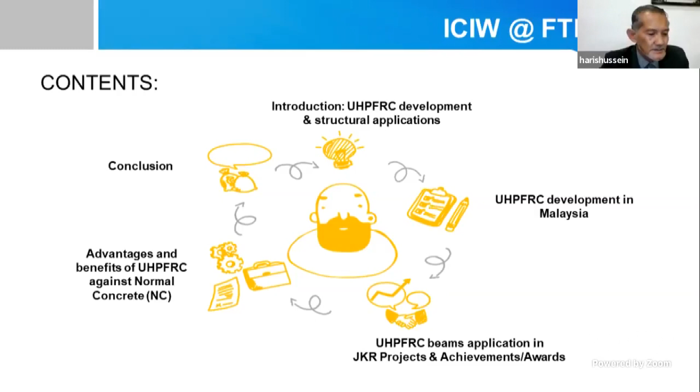Okay, let's go on to item 1, introduction. Ultra high performance fiber reinforced concrete was one breakthrough in concrete technology in the 20th century. Its dense homogeneous structure provides excellent durability properties, as shown in figure 1. Its compressive strength is more than 150 MPa, and tensile strength more than or equal to 8 MPa. And it was recorded as well that the ultimate flexural strength of the product is 30 MPa. In terms of structural application, details are shown in table 1. Okay, let's go to table 1.

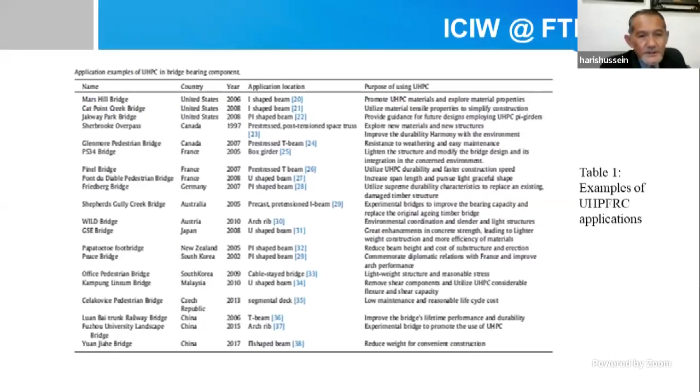As you can see, many applications have been done by many countries, like US, Canada, France, Germany, Australia, Japan, New Zealand, South Korea, Malaysia, of course Czech Republic, as well as China. In terms of application, mostly for superstructure, for road bridges, as well as pedestrian bridges, but a few for rail bridges, which is being done by China as well as Germany.

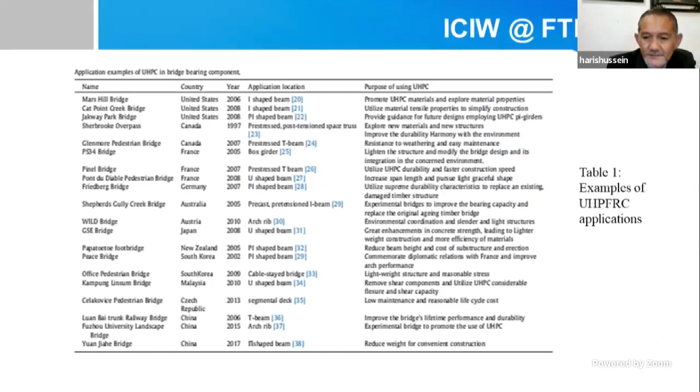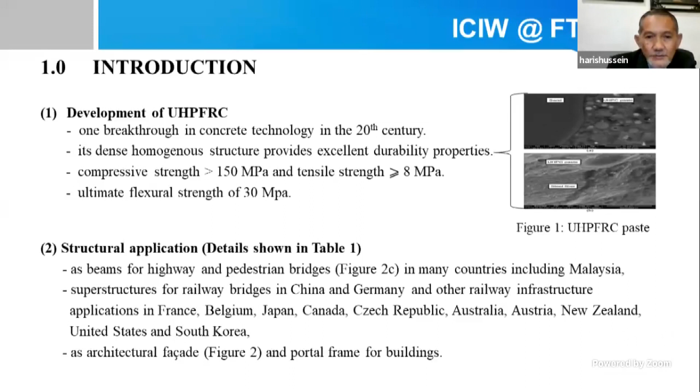Apart from beam superstructure, ultra high performance fiber reinforced concrete is being used as well for architectural facade and portal frame for buildings. Figure 2 shows some examples of being used for facade, like at Museum of European and Mediterranean Civilization in Marseille, France, and for footbridge of Peace in Seoul, South Korea.

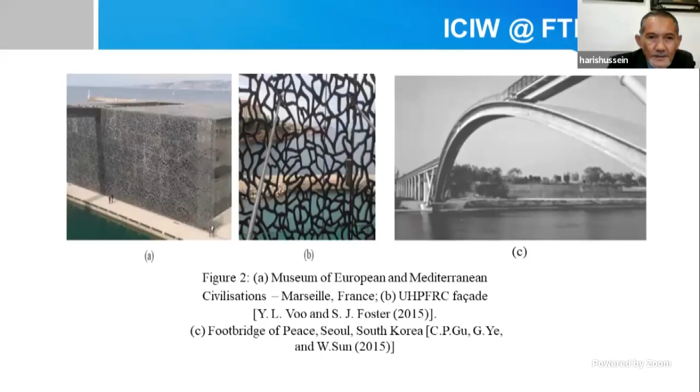Let's go on to the establishment of the company. It started when a company by the name of Dura Technology Sendirian Berhad was established in 2006, where a factory was built nearby Chemor town, about 17 kilometers away from Ipoh City.

The name Dura is synonymous with durability, specializing in ultra high performance concrete. The company believes with the advancement of technology in the field of building material, concrete can be innovated further, maximizing its potential and capability. DTSB, in short, aims to bring building material and building system into greener construction, the best solution to achieve sustainable development goals at minimal cost through continuous research and development for better product application.

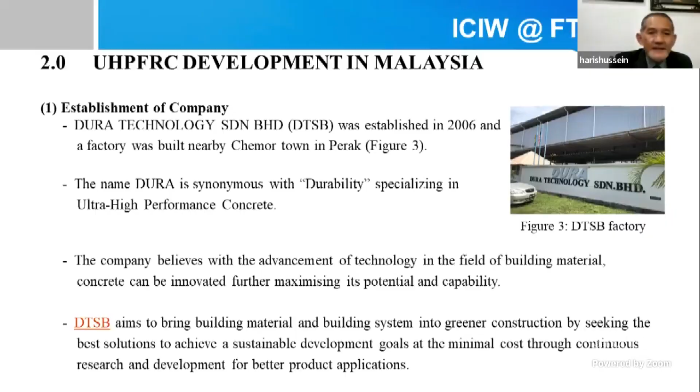Now let's go on. When did JKR first embark into this new concrete technology? It was in 2008 when JKR organized its Senior Officers Conference, or SOC, in Ipoh, Perak. I'm born in Ipoh, so I can just tell a bit about Ipoh. An exhibition booth was set up and local companies were invited to participate and share knowledge of their products.

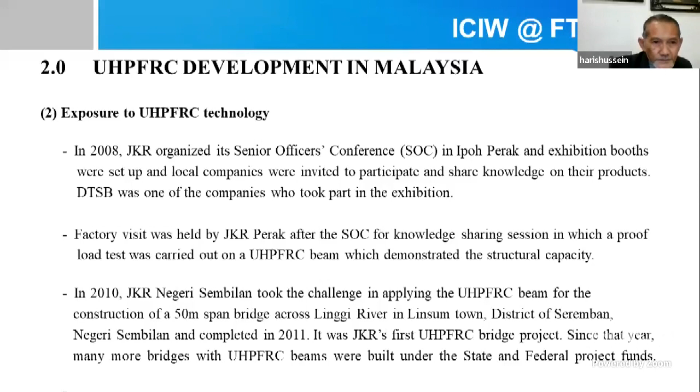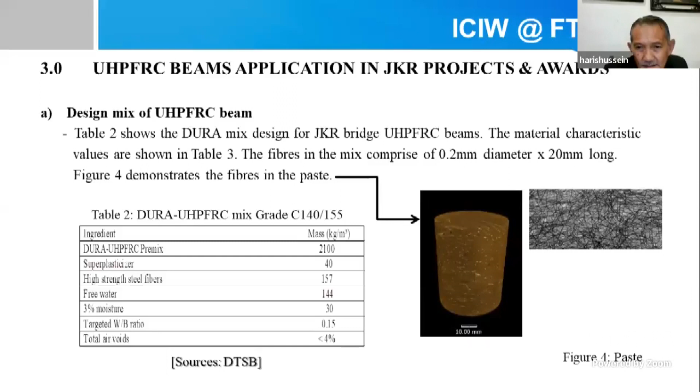Let's show the video, which shows how the mix is being done actually in the ultra-high performance concrete paste, whereby you can see the fibers are being mixed thoroughly.

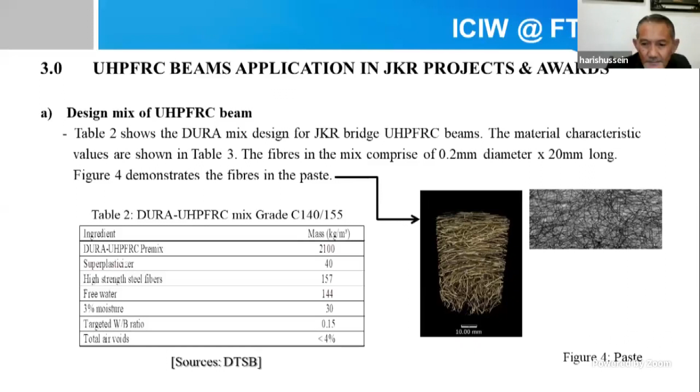Table 3 shows the material characteristic values for ultra high performance fiber reinforced concrete for grade C140, 155. In every design of beams for JKR bridge projects, the material characteristics are as shown in table 3. These values are verified by laboratory tests, with results shown in tables 4, 5, and 6.

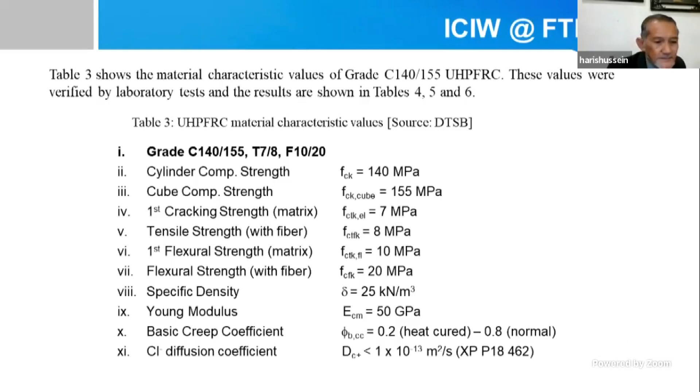Table 4 shows the characteristic compressive strength carried out on several cube samples, achieving 155.24 against the required 155. For characteristic compressive strength on cylinder samples, the value is 151 against 140, exceeding the limit required for the concrete grade.

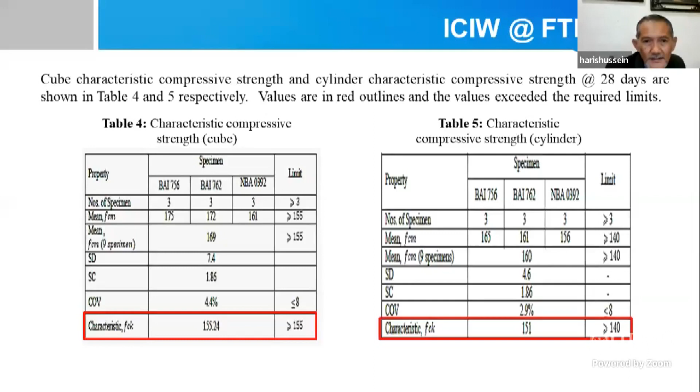Table 6 shows the results of the 4-point and 3-point bending tests for flexural and tensile strength for grade C140, 155. Values shown in red outline all exceed the limits and comply with the required standard. Figure 5 shows the layout of the bending test carried out to verify grade C140, 155.

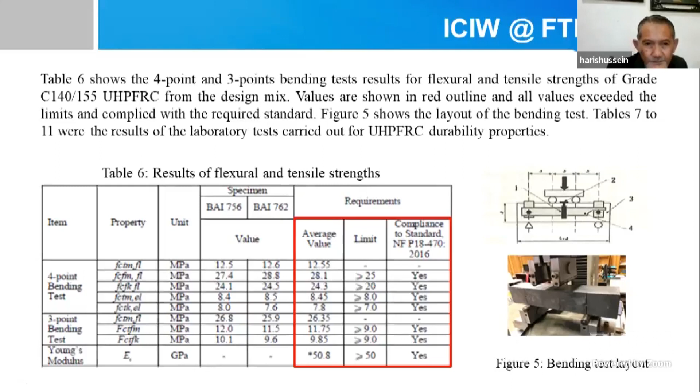Durability tests were also carried out, one of which is the chloride diffusion coefficient. The result for ultra high performance fiber reinforced concrete is much better compared to normal concrete used for structural components.

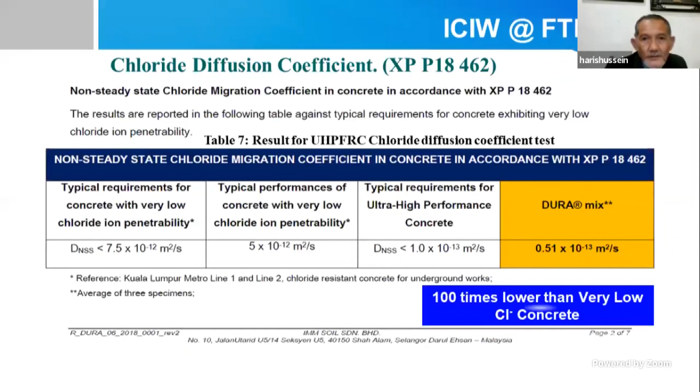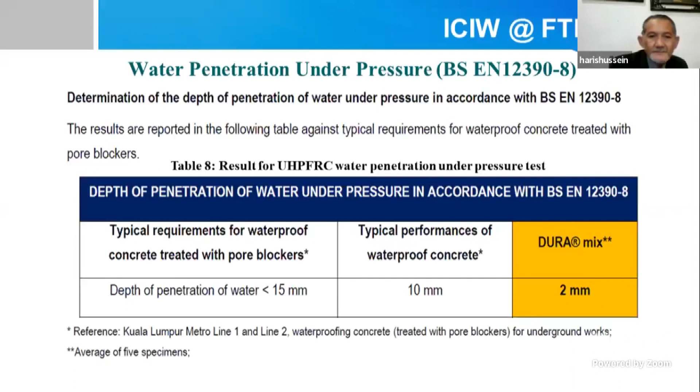Similarly, for water penetration under pressure, it is only 2 mm compared to 10 mm for normal concrete. The rapid chloride penetration test for ultra high performance fiber reinforced concrete is 35 coulombs, compared to 100 to 500 coulombs for normal concrete.

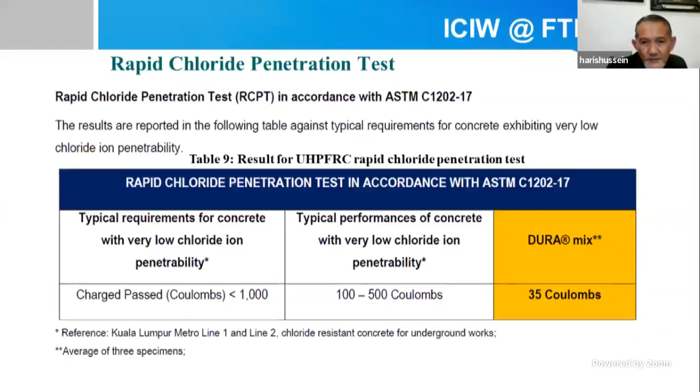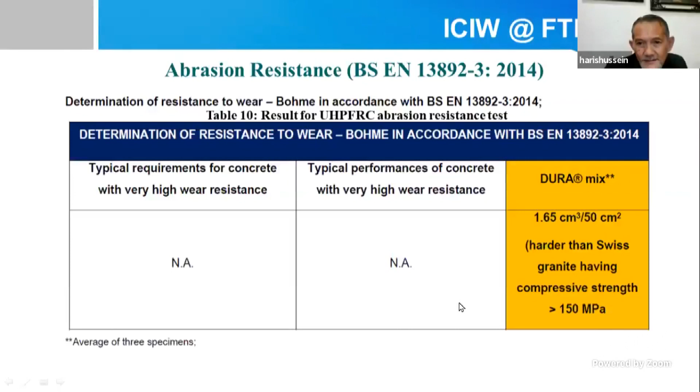For the abrasion test, resistance complied with the standard, and carbonation depth is 0 mm, meaning no penetration for carbonation.

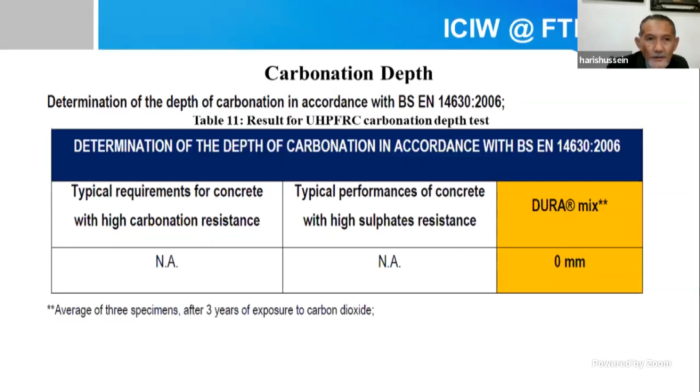In terms of standards for material design as well as construction, the French standards NFP 18-470, NFP 18-710, as well as the execution standard apply. P18-470 is for material compliance for the mix, and P18-710 is the design standard which needs to be complied with specifically for ultra high performance fiber reinforced concrete. The execution standard is to be followed during construction.

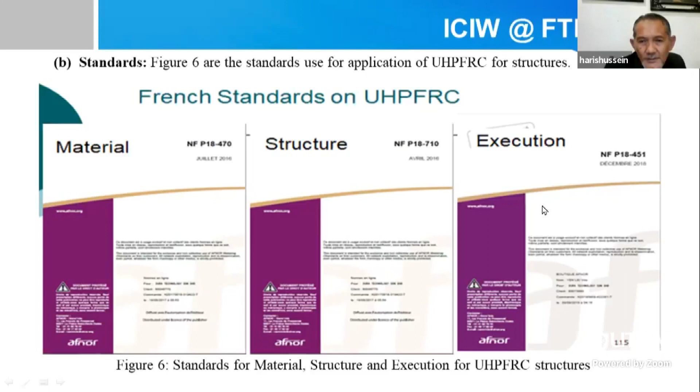Fortunately for JKR, since many projects have been executed using this product, JKR has also included the ultra high performance fiber reinforced concrete requirements in their JKR standard specification for roadworks, section 9, which is concrete.

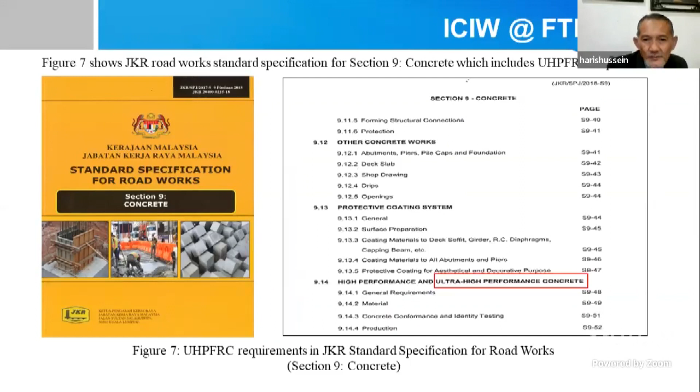The photo shows examples of ultra high performance fiber reinforced concrete beams used in JKR projects. Basically, they are I-beams, T-beams, or U-beams. Figure 8 shows one example of an I-beam of 1.2 m height, 29.25 meters long.

Figure 9 shows the Dura U-beam, 2.5 m height. Compared to normal concrete, where we definitely use reinforcements, for Dura beams we do not use reinforcement but only fibers. Therefore, no stirrups and shear reinforcement are required.

Multiple segments can be joined with PT internal tendons, and only dry joints are used. The SLS cracking tensile strength is 7 MPa.

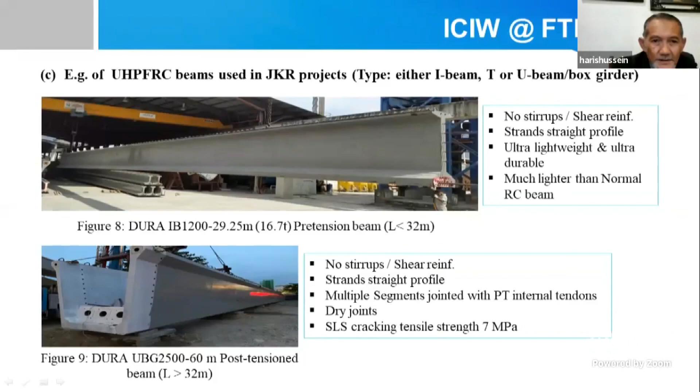This is one example, the Manong Bridge construction, which is 300 meters long across the Perak River. It actually has 5 spans: 45 meters for the first one, followed by 3 spans of 70 meters each, and the last span is again 45 meters, totaling 300 meters.

Formerly, it took 40 minutes to travel from one side of the bridge to the other, but after completion of the bridge, it only took 2 minutes to cross the river to the other side. This side is Sayong town, and the other side is Manong town.

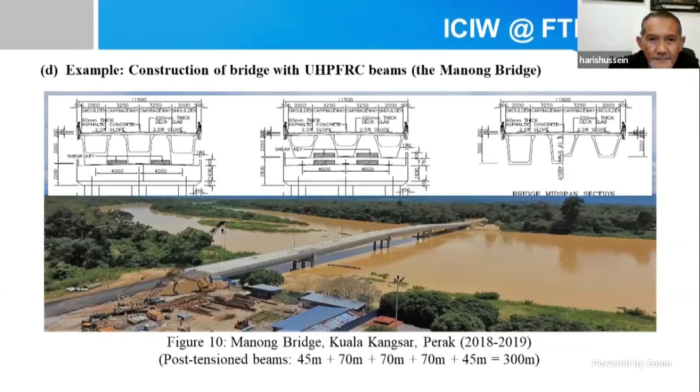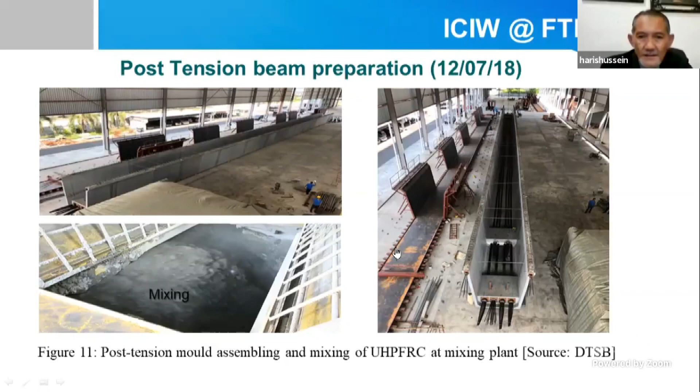Inspections are done at the factory just to witness whether there are cracks or not before the beams are delivered to the site.

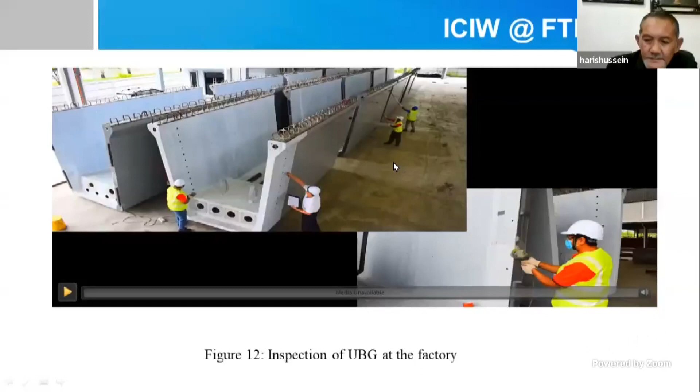These are the achievements and awards received for the construction of the Batu 6 bridge across Perak River at Bandariang, Gerik. As mentioned, in 2016 the bridge was awarded the best international transportation structure in terms of design.

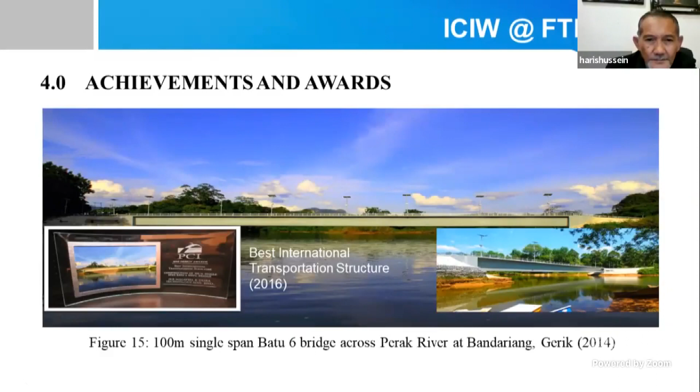The second award was for the world's first submersible ultra high performance concrete composite bridge, which is the Lambor Bridge, 404 meters long, also across the Perak River.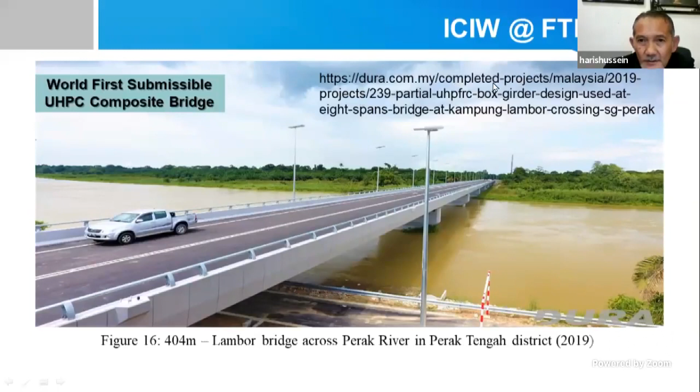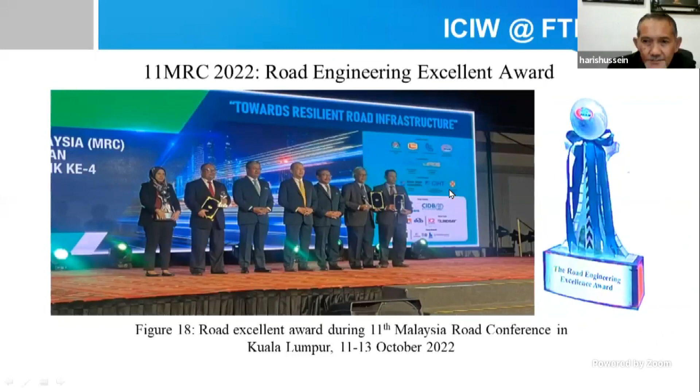Since 2010, when the first ultra-high performance fiber reinforced concrete bridge was constructed, till 2022, a total of 29 bridges were completed by JKR. Table 12 shows the list of all projects in several states in Malaysia.

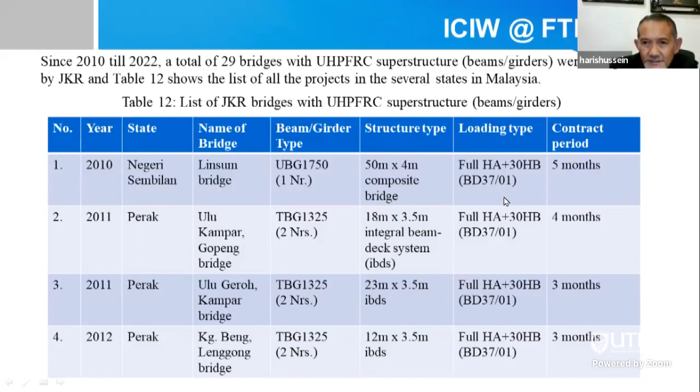The first one, of course, is in Negeri Sembilan, followed by a few in Perak. You can see here various types of beams or girders being used: UBG 1750, TBG 1325. The spans vary, and the loading types shown here include full HA plus 30 HB units. The construction period is less than a year, some only 4 months, 3 months.

We also have a UB of 650, a shallow one, in Rompin, which is 12 meters span and 4 meters wide, with an integral system.

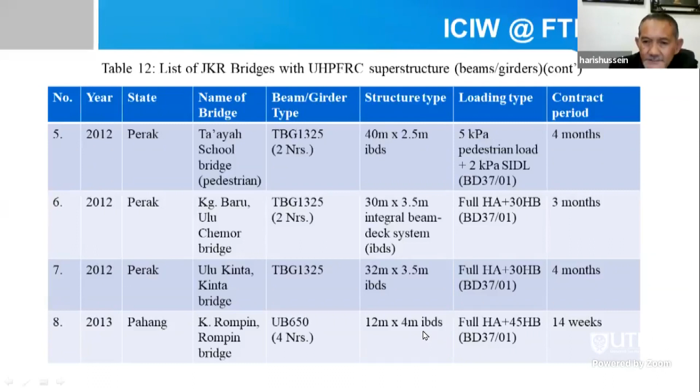We also have pedestrian bridges, one of which is at Kuala Sepetang, which is 106 meters long including the ramps.

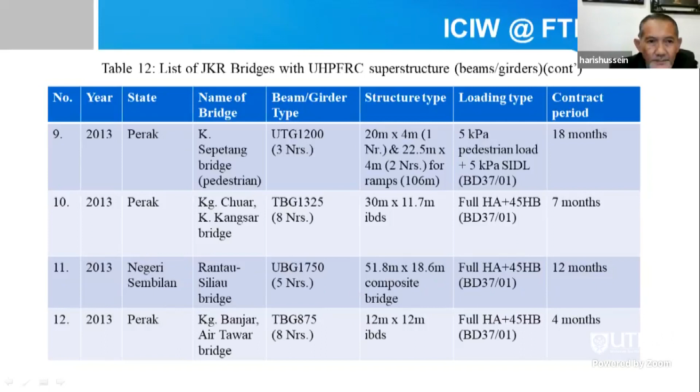We have item number 16 at Batu Enam, Kampung Rhui, Gerik. It is a single span of 100 meters long without any piers in the river. At the moment, this bridge is the longest bridge in the world that uses ultra-high performance fiber reinforced concrete as its beam, a single span of 100 meters across the Perak River.

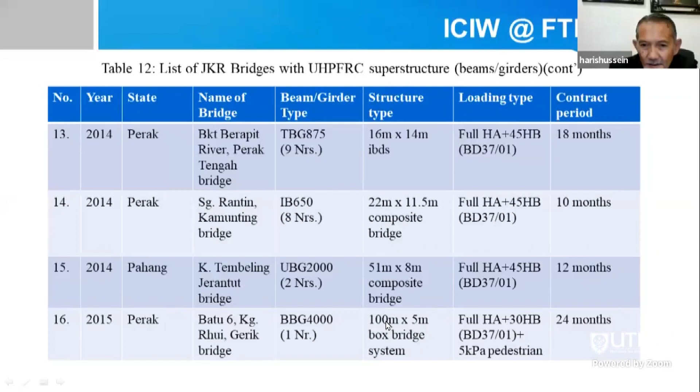We also have projects in Kelantan, in Selangor, in Johor, and in Pahang. Those are the only states that have used this product or this technology for their bridge construction.

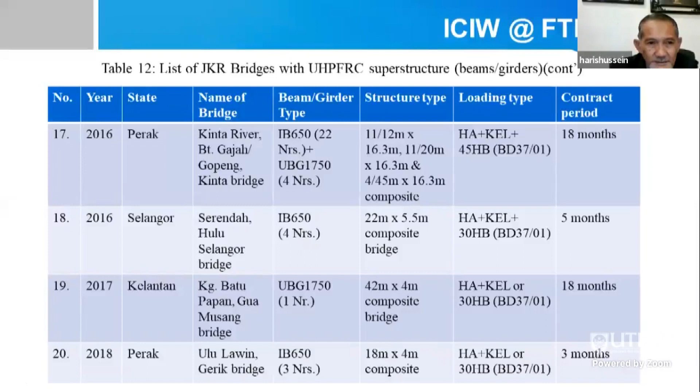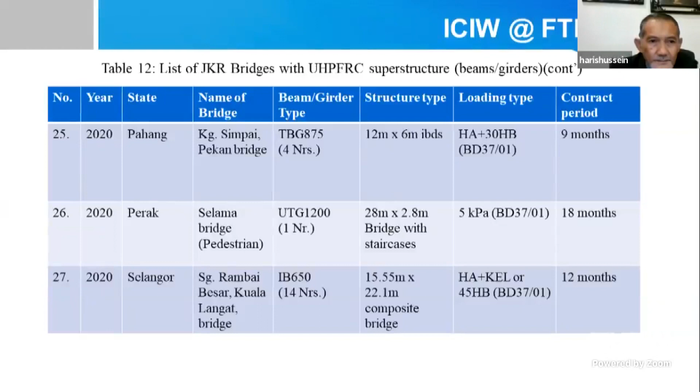Compared to normal concrete beams, which can only carry one at a time. Two, ultra-high performance fiber reinforced concrete has superior mechanical properties and durability. As shown earlier, the compressive strength is more than 150 MPa, and the tensile strength is more than or equal to 8 MPa, compared to normal concrete's 50 MPa, which is 2-3 times higher.

Three, ultra-high performance fiber reinforced concrete structures have very long service life and negligible maintenance. By looking at the surface of the beam, it can be seen that it's more aesthetic compared to normal concrete.

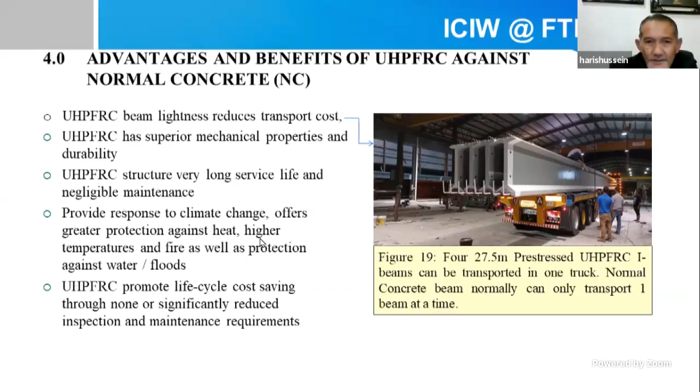It also offers higher sustainability measures: better global warming potential measurement, carbon emission and carbon footprint. By having a shorter construction period, environmental impacts are much reduced, which is good for the surroundings, especially where there is dense population or traffic congestion around the construction area, leaving a true legacy infrastructure for future generations with state-of-the-art infrastructure.

Table 13 shows the design life, which is beyond 150 years, even under most severe conditions.

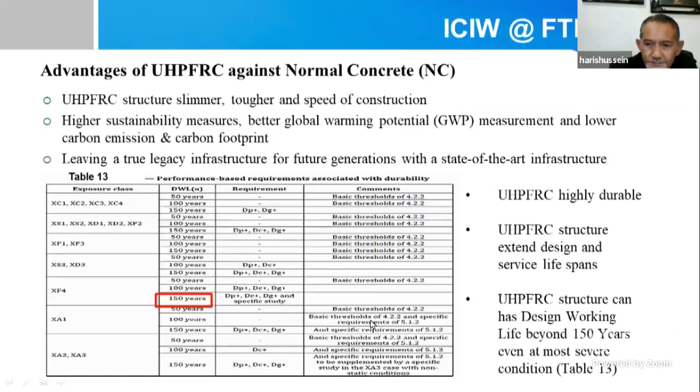Ultra-high performance fiber reinforced concrete is very suitable for use in long span construction. Why? Because the longer the span, you don't need any piers in between the two supports. Therefore it reduces cost—you do not have to construct the piers or foundations.

Ultra-high performance fiber reinforced concrete also provides minimal adverse time effect impact, as mentioned—a shorter time period means less impact to the environment—and it prolongs life serviceability due to its excellent durability properties.

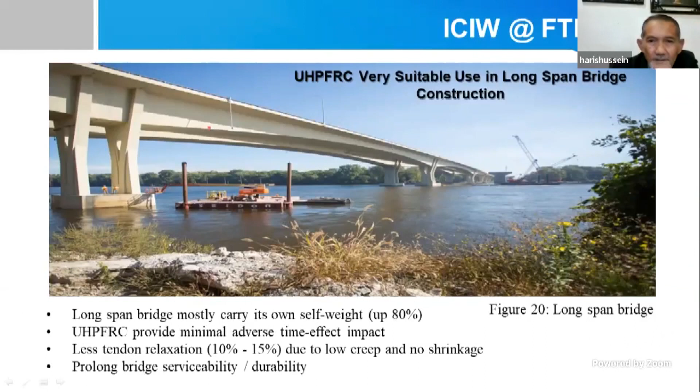Figure 21 shows the cost comparison of conventional versus ultra-high performance fiber reinforced concrete bridges. The red line shows the normal bridge cost on average, the broken line is the upper bound cost, and the bottom blue line is the lower bound cost for normal concrete bridges.

For ultra-high performance fiber reinforced concrete bridges, divided into driven pile, micro pile, and bored pile as shown in the figure, most of the bridges—whether using driven pile, micro pile, or bored pile—fall below the red lines, which means it is much cheaper in terms of construction compared to normal concrete bridges.

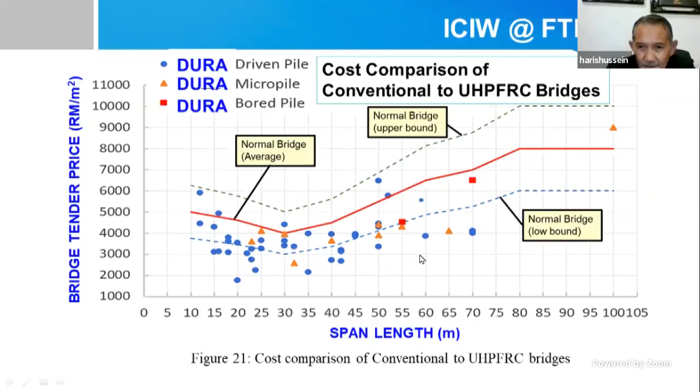So in terms of cost implications, generally, ultra-high performance fiber reinforced concrete bridge has saving compared to normal concrete bridges. The saving percentage depends on locality, structure sizes, logistic, manpower availability. Initial capital cost is higher in comparison to conventional concrete, of course, but on the overall cost, it is much cheaper. However, the total cost benefit from the total asset life cycle significantly outweighs the cost implication as outlined in the benefit section presented earlier.

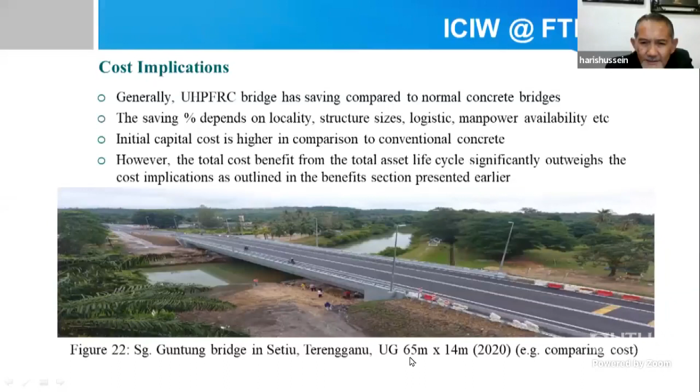For example, figure 22 shows the Sungai Guntung Bridge in Terengganu, which comprised of U-beam or girder of 65 meters long by 14 meter wide. Let's compare the cost. The cost for foundation is 917 per meter square, substructure 550 per meter square, and superstructure 2648 per meter square. So you can compare here. The overall cost is only 4,115 Malaysian ringgit per meter square.

Similarly, for Kampung Teluk Kampung Baharu Bridge in Manjung, as I mentioned just now, the longer the bridge is cheaper compared to short span bridge. See, the amount here per meter square is only RM3504 compared to the earlier one, 4115.

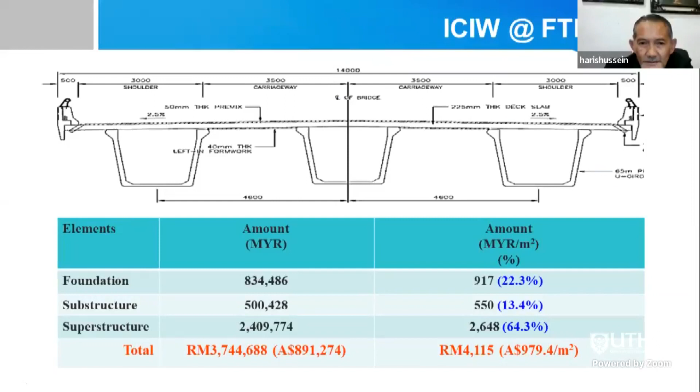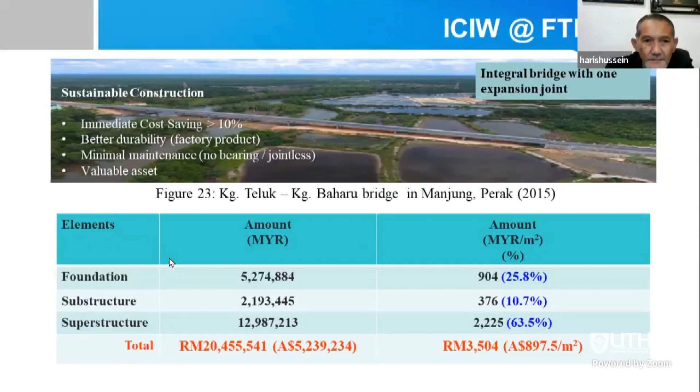So in conclusion, the utilization of ultra-high performance fiber reinforced concrete in road and pedestrian bridge superstructures is no longer at an infant stage in JKR. A total of 29 bridges were completed from 2010 till 2022. It is a proven technology which JKR has scrutinized for its unique properties for creative and innovative design in road bridges in Malaysia, for example, the Lambor Bridge. Knowing its advantages in bridge construction, JKR has incorporated ultra-high performance concrete technology in its standard specification for roadworks, section 9, which is concrete.

In fact, JKR has also shared its experience with other departments like Ipoh City Council and Drainage and Irrigation Department or JPS in the application of ultra-high performance fiber reinforced concrete for road bridges. One such example of a JPS bridge is the Central Spine Bridge, which is 200 meters long by 17.4 meters wide, located along the East-West Highway in Gerik, Perak. And recently, the Penang Port Commission or PPC has shown interest in the application of this concrete technology.